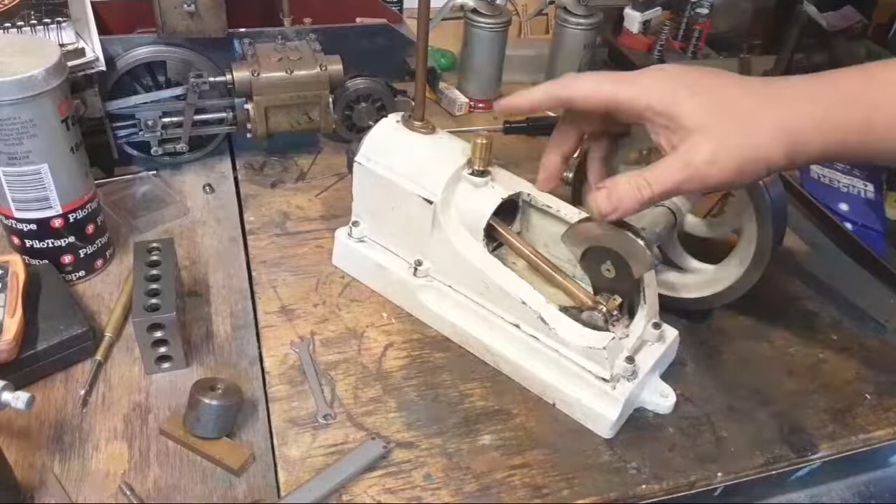Anyway, is there any blowback? I think so, I pulled them out last night and put them back in. They're not shiny all the way around, there's a couple of spots that still got machining marks in the rings. So I reckon this wants just messing with and playing with and turning over another few hundred times. We're still getting pretty dirty oil out of here, so I'd say the high spots are still coming off them. So I think we've got enough compression to run, but yes, there's definitely blowback. But we've also got a leaky head because I've only just bolted that on with a bit of grease.

I've done a fair bit of work here. Anyone following the Patreon project probably can tell.

I've put a spacer behind this gear. When I built this casting and made this pattern, I probably should have put little risers on the back here to machine off, to give us a raised surface to run this cranking gear on. But I never did, so it's just a flat wall. So I've put a little brass or bronze washer in there to take some of the rattle out of it this way — you don't get the rumble now.

I got this crank ground, the journal, I've made a new bush for that. I've filled this, I've oiled this. I put a bolt in here so that the bush doesn't turn. I made this end collar and put that on. I've drilled the piston and the big end so that the gudgeon gets oiled.

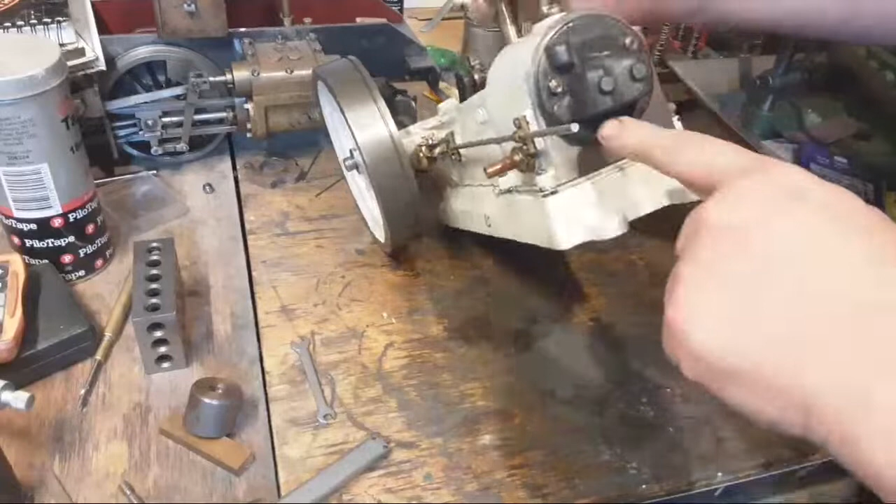This is an awkward thing to hold and set up. It is fairly level there. The casting's kind of pretty crap, actually — well, it's all right, it's a beautiful casting. But if we have a look, this isn't quite level across here. I've set it up level on these two dots here for the valves. This isn't quite, this is pretty good, and this has got a bit of slope in it too.

The rocker goes on here. The valves are about the same size as this. There's a manifold that goes in here with the exhaust pipe poking out under here, and gas inlets on this side.

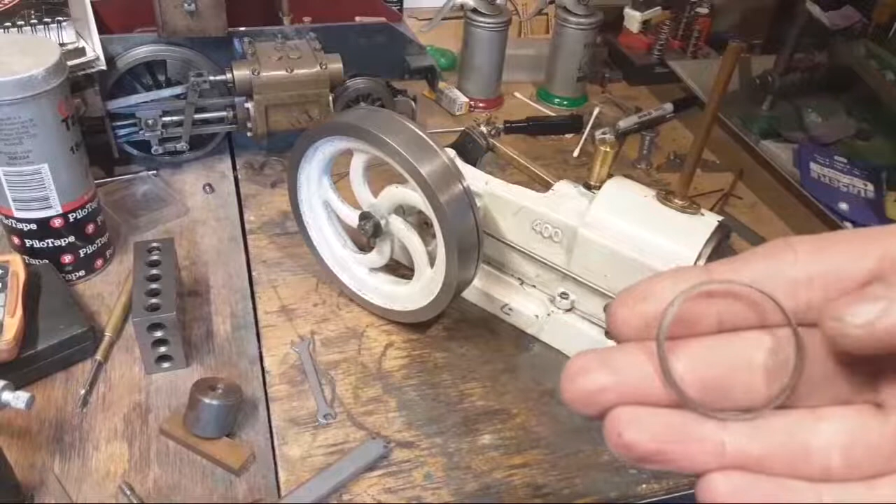Let's start with Craig's question about spare rings. I made 5 rings, this is them. They're narrow on one side and thicker on the other side - it's offset. That is so that when you split this, when they squeeze in, you've got equal ring pressure all the way around. There's as much pressure on the back here as there is on the sides, so that's the reason for that.

I've been asked that question about half a dozen times this week. I split them, and they needed about 1/8 inch gap, something like that, before they squeeze in and go in with minimum ring gap. So I just parted them off. I worked that out so I knew how much I could offset it, and I just put a shim under one jaw when I bored them, then parted them off and lapped them on a bit of wet and dry on the surface plate, then split them on an angle across, and fitted them in the bore, and they've got about 5 thou ring gap. So pretty happy with the way they worked. I've got 3 extras, may never need them.

Hey Steve - are there pockets under the valves? How do you mean by pockets? Does this have valve guide seals as well? No, not as such, it sort of does. I guess that's what you would call them, really. There's no actual seals as such, but it has got brass pieces in that end of the valve that rub against here, washers that follow up and down, that probably work something like valve guide seals, or valve stem seals. But we'll work that out when we go. I don't know, I reckon it's going to blow smoke everywhere, and oil.

These have - gosh, there's a drawing right here, I've been looking at it all week. This is what the ports look like inside. So this is straight through with the valve guide, and it was valve stem guide there.

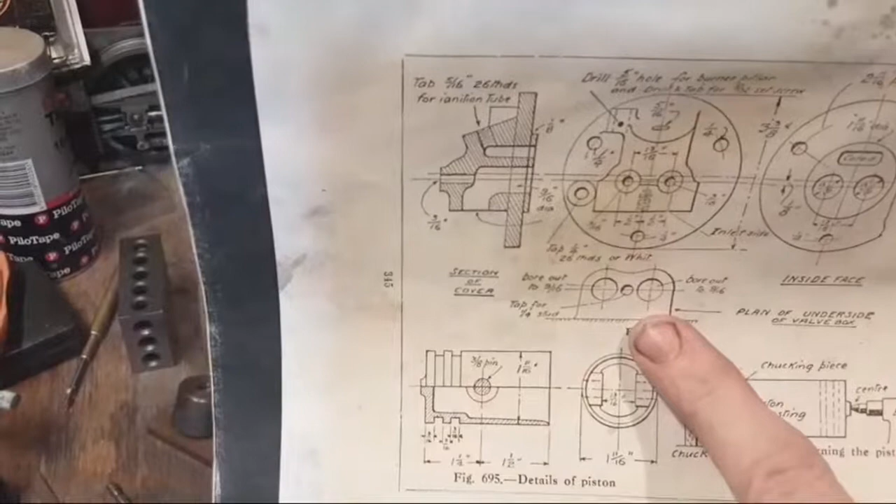And this one comes up from the top. This is a machine surface, and the manifold, which looks like this, bolts underneath. So pretty simple. It's got this piece here which should have probably been cored, but it's way too small to core successfully in this little casting. And in this little casting you're going to end up with hard iron because you're going to end up with chill spots and all sorts of things. So it's a better idea not to.

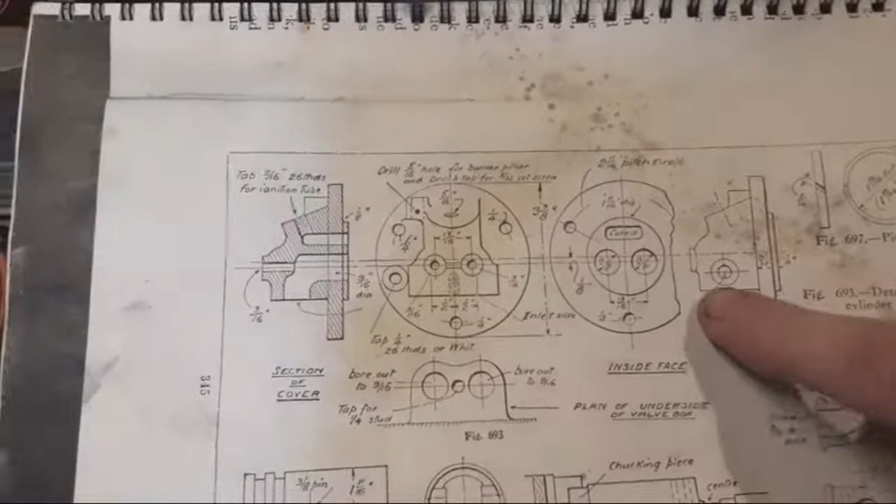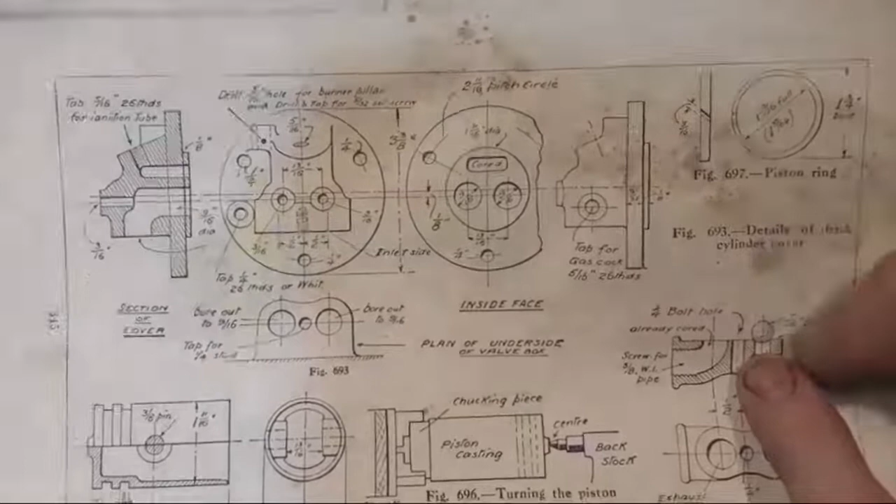It's 5/16/26 gas, the thread in the side there which goes in through here, which is for the gas valve. And the carburetor is basically a ball on a seat which stops the gas escaping. When it sucks, there's a little bit of air gas coming in at fairly low pressure, and it sucks the air in as it's needed. Then when the valve closes, this ball sits back down.

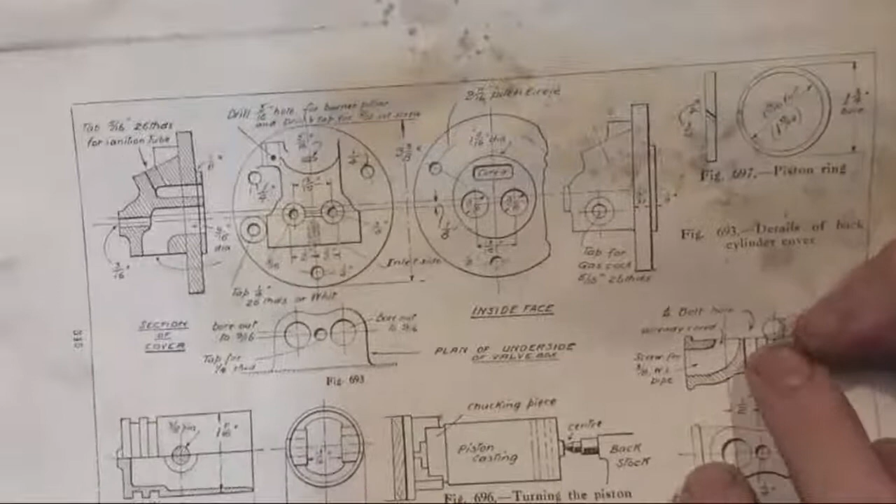So fingers crossed that works. I'm a bit nervous if I make this out of aluminium, which I originally intended, that we're going to end up with heat transfer from this side to this side, because this is the exhaust, and you're going to end up with pre-ignition. But I'm not sure how big a fear that is or how real it is.

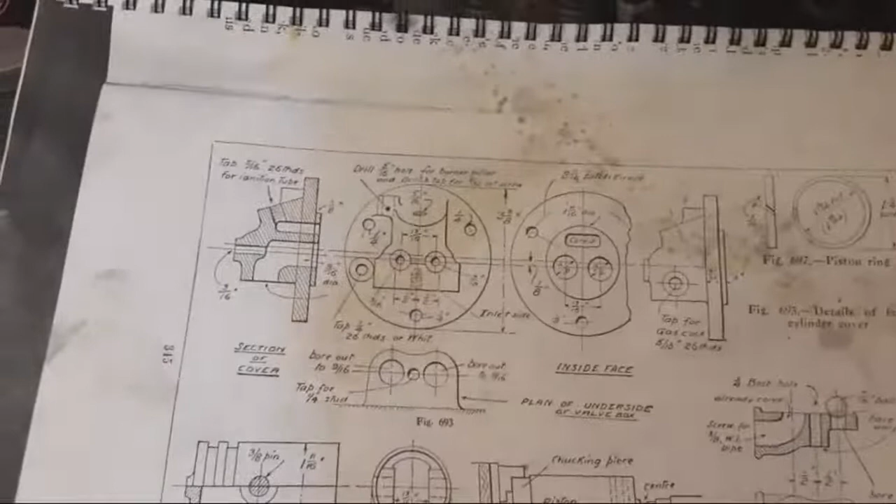These are all things to think of when you're designing and building an engine from more or less scratch. Although you've got drawings and dimensions and some notes, there's not much here really. So these, it says 9/16, but they're not that big - they're about 10.7, so whatever that is. 10.5, I'm probably I can get away there. This thing's about 93 thou bigger in the bore, so I can probably get away with 11 millimeters here.

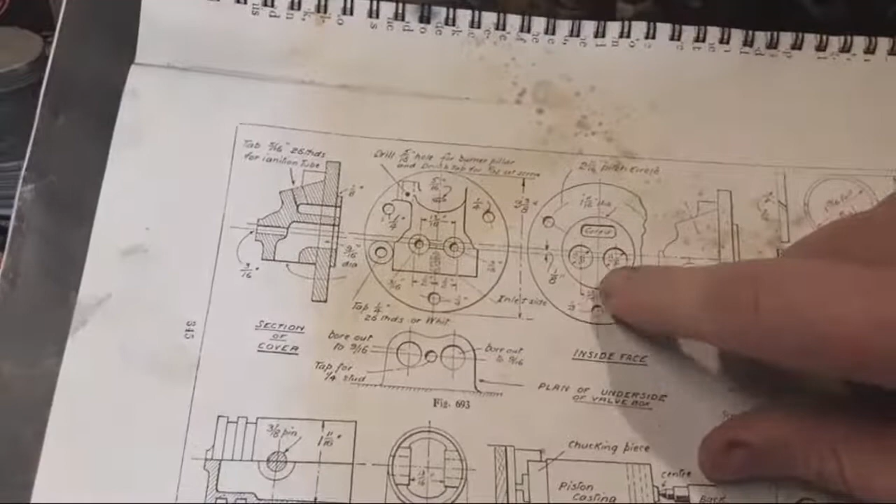And I'm just going to put these straight through, straight in here with sharp seats at this point, and probably we'll see how we go with valve seats. I'm not real confident about them. And the spark plug comes in from the top there.

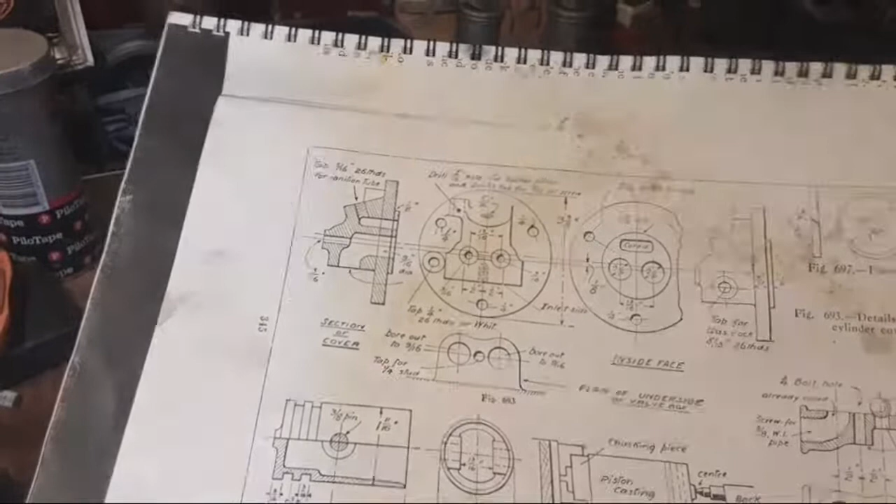The head snaps sometimes on two-piece. Right, that's fair, I hear what you're saying.

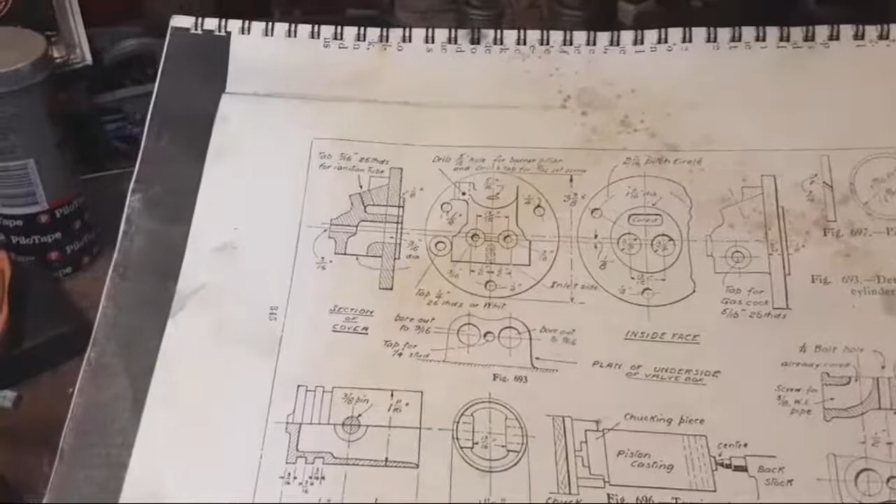Original had alternative screw-on valve head. Yeah, someone's been doing their homework. This is the valves - I don't think it's screw on, I think it's just two different shapes. This one's round and this one's been recessed.

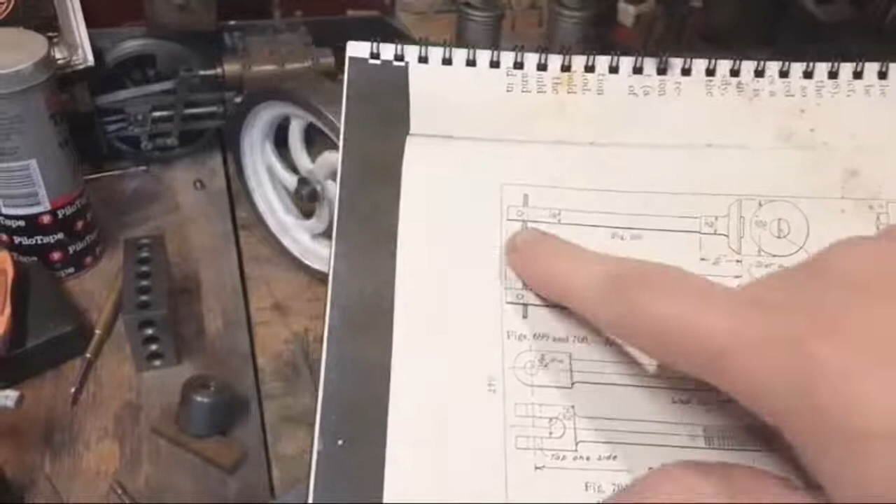They got a pin across the bottom of them, and that's going to mushroom out if I know anything, if I don't heat treat them of some sort. Whether I put a collet on there and a thicker washer, like a C-section washer on there and a collet, which might be easier if we machined a groove with a C-clip so that you pull the spring down and put the collet in and let it go.

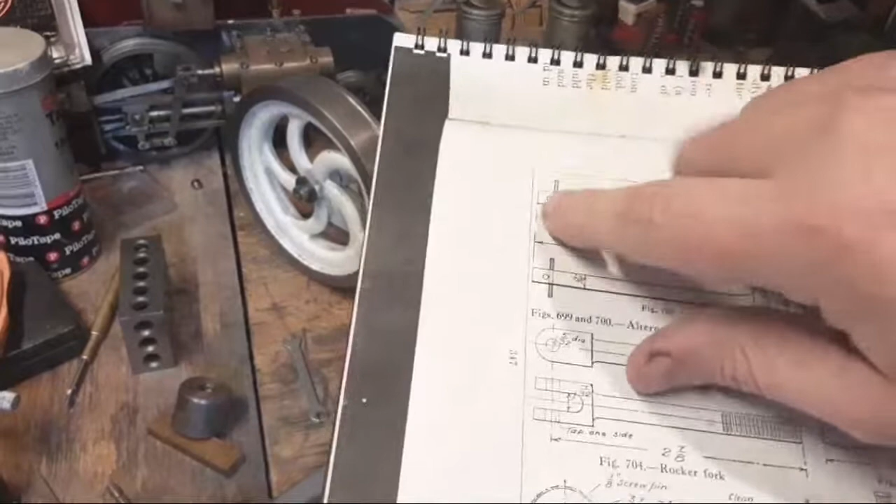That's probably a better system than a hole. I don't think much of a hole through the end of a valve, but if they're heat treated, then probably they'd be okay. This one, I don't think they would let go, but expansion might be different when they get hot and they could leak.

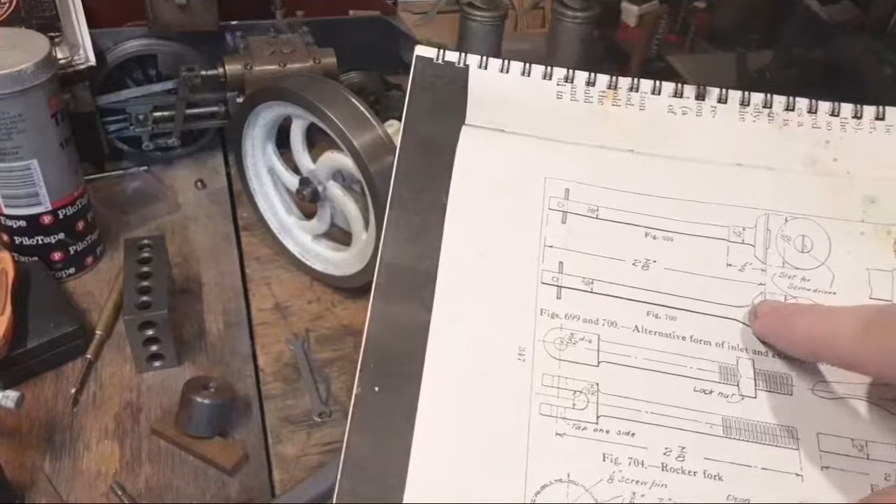If I make these out of two pieces out of O1, I'd be reluctant to silver solder it because I think you'd get hard spots and they would break. Probably you could machine this out of half-inch O1 and get reasonable results, or even out of something a bit softer, like a 1020 or a 1045, and case harden the ends of them might work too. So lots to think about there.

Kevin asks all the difficult questions. How do I cut the valve seats? Really good question.

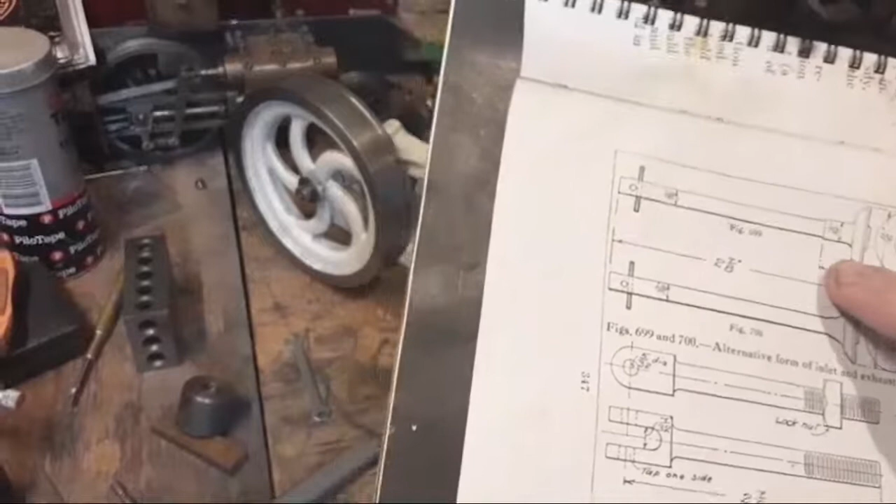I'm not going to put much of a valve seat on them. There's not going to be any 3-facet valve seats and any of that kind of gear, although that's probably the easy way to get them right if you could be bothered making cutters. I'm probably going to leave the seat square and make these fit in the right spot here so that the wear lines in the outer third where they should be. Gosh, I've learned a lot of stuff about engines in the last 12 months.

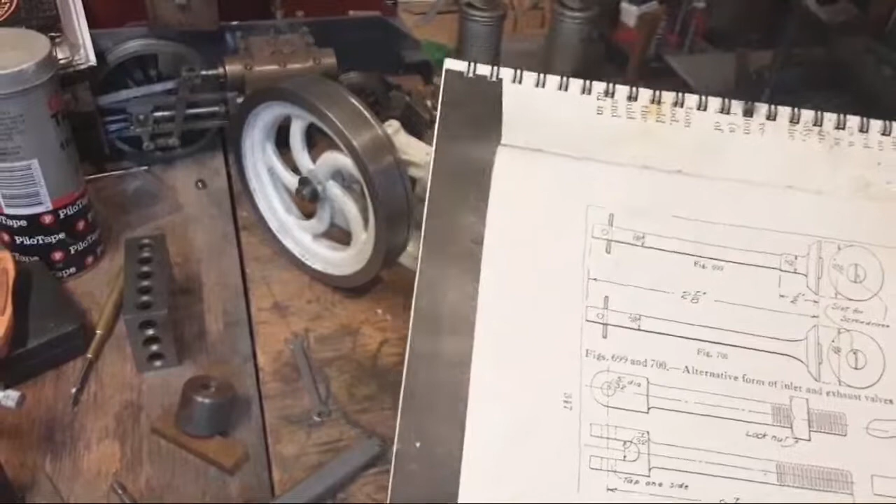And lap them at that and see if they seal. I'm probably not going to put long seats on them. I think they only want to seal on one ring around there. I don't think they want long seats. Decent valve seats with 3 facets are only very, very tiny as well. So I think I'm just going to leave them square and lap them. There we go.

That's probably all right, Kevin. I'm not sure about distortion too.

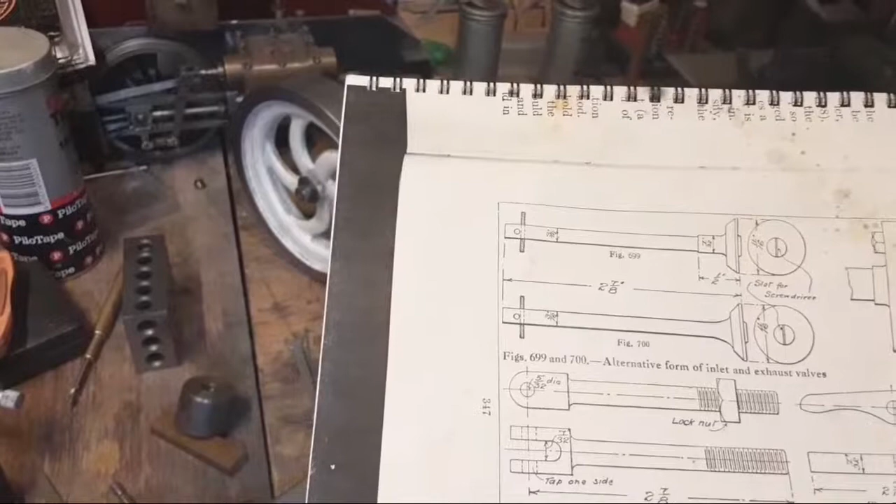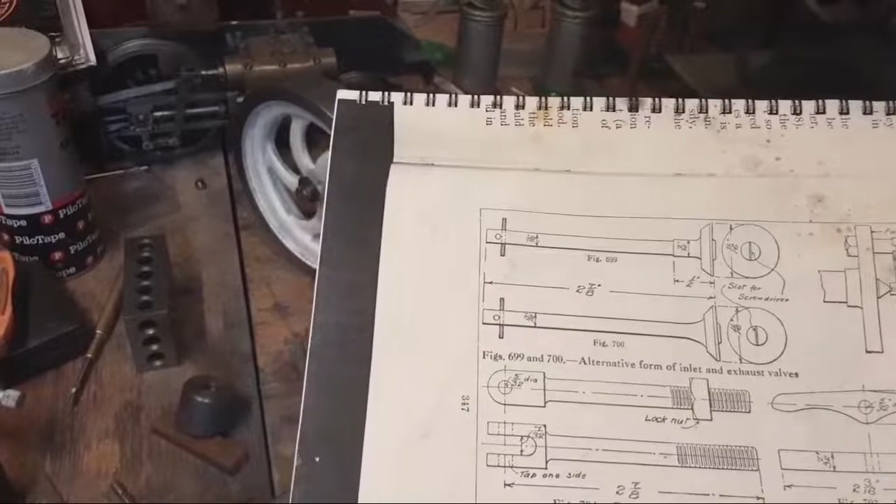Thanks, Uncle Bob's Bees. Could make a stone with a taper, yes, and a valve guide. I could do that. Hey, Stewart. Yeah, thanks, Warren. Thanks for confirming that. Thanks, Craig.

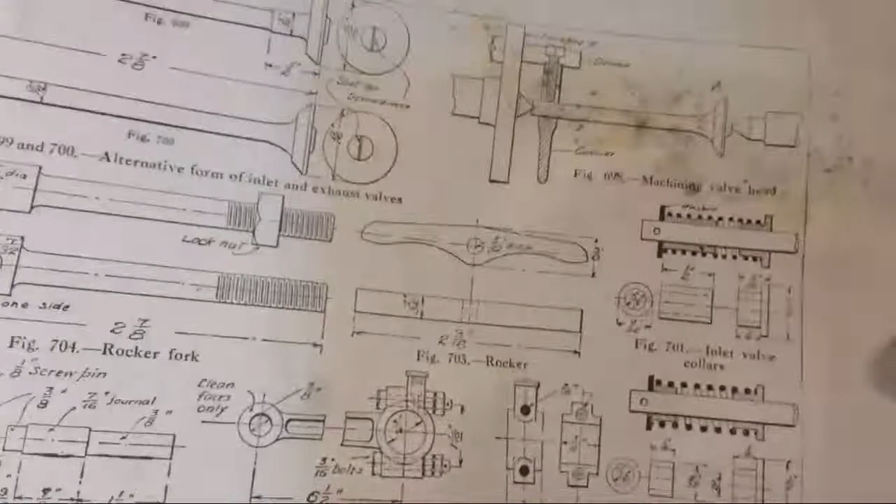So that's where we're at with that. This is how the valve stem seals, whatever they are, work. I don't know, there's this bush here. I'm not sure really its purpose. And there's a washer, right? And then I guess that's a tight fit inside the spring, and that holds it up against there, up against the washer.

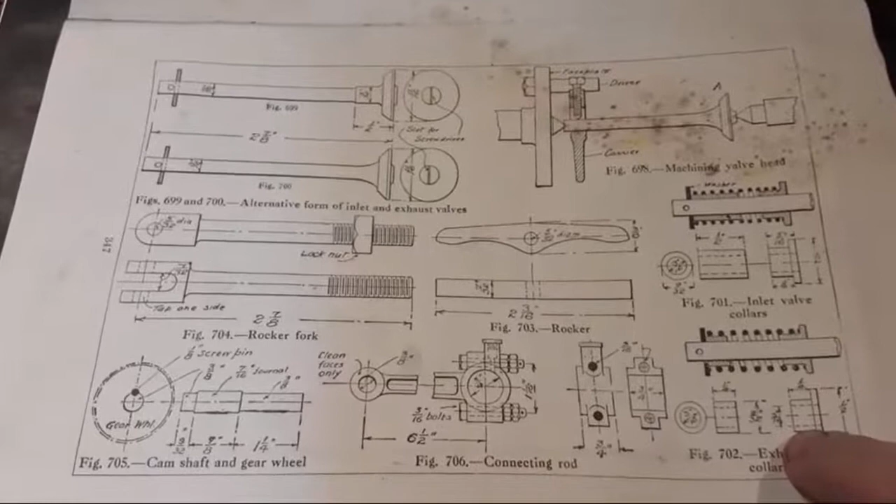And then this one here, I'm not sure about that. If anyone's got any insight into this one, here goes over the top, and the pin goes through here in the washer, and then this one goes on the bottom. This is the head end. So there's this piece here, which goes over the top, which this sets on, and then this piece here.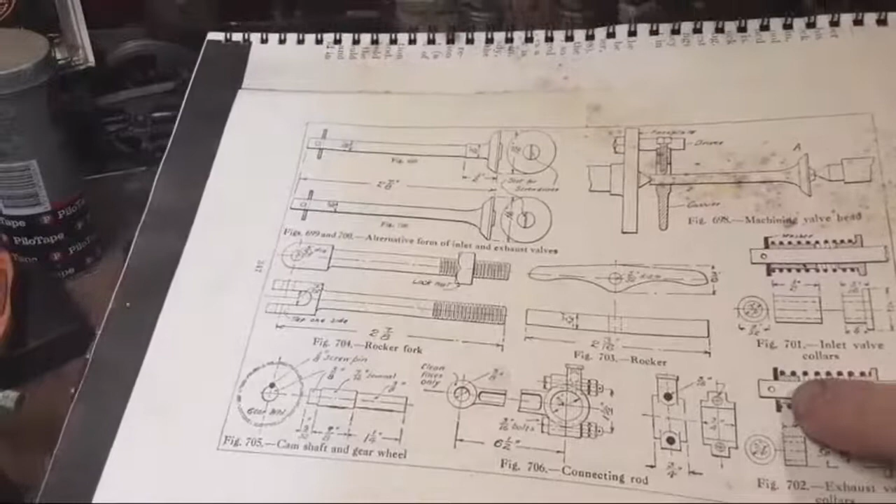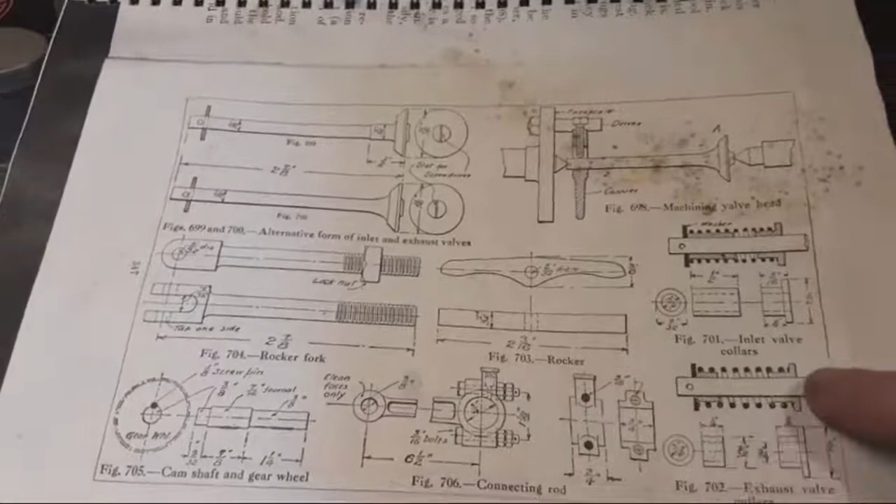I'm really not sure what this does. I guess it centralizes the spring, but I think I'm probably going to redesign this a bit. This does limit travel a bit. This is your exhaust valve, and your inlet valve hasn't got as much travel, so it doesn't suck as far. So this is quite a bit longer on the inlet valve.

Maddie, you're probably right there.

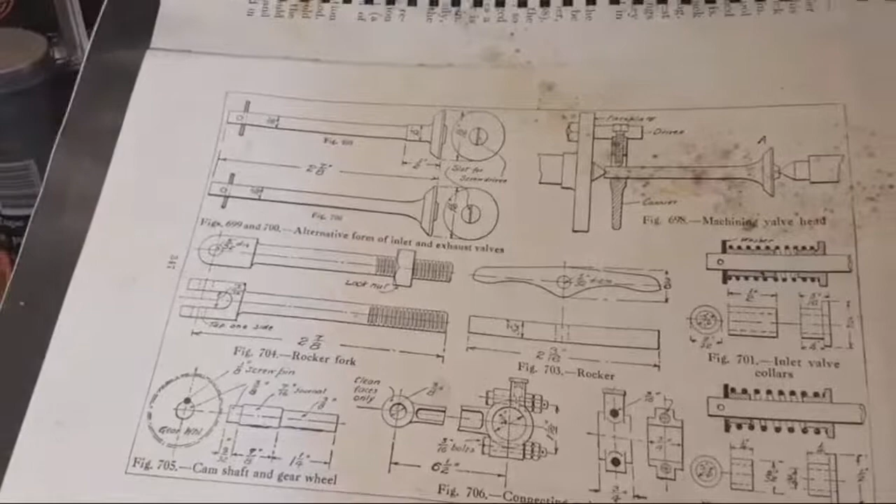So this is, yes, there's lots of bits in this engine. I don't know if you noticed, but there's a fair bit of work here. I've been 12, nearly 18 months on this. I've been 18 months getting it to this stage.

And we've got compression. And it's getting better all the time. So that's, I think we've got enough compression to run.

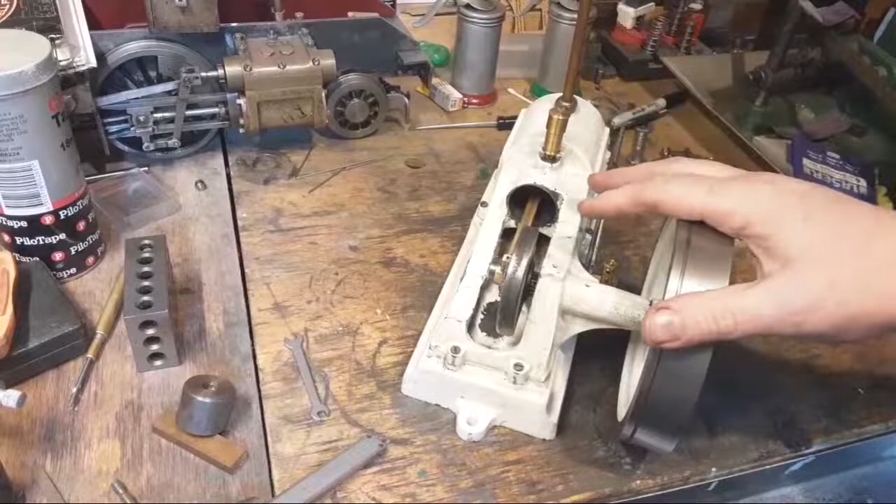We've just got to get some timing, got to get some spring tensions right, and we've got to get some gas right. There's just a little union cock on here that goes, the threads in here with a tap on it for gas regulation, and I guess we need a regulator on the tank. Well, I'm going to just run on a little LPG or propane tank. I think it's nice and clean and easy.

There's enough work in that loco. Got bolts coming for the tender, so I can move on with that now. I've got a new 3-jaw chuck, but I really wanted to make some progress on this, and there's probably going to be another video out on Patreon with this cylinder head.

This is not sitting real firm because there's a fair bit of weight on this side here. It's all right, there's something under it. The other thing is that we've got, I don't know what's under there. Something's under there, there's a bump there. Oh, it's glue or something on the bench.

That's what that is. The other thing is a cooling system. And the easy way is just to put a tank here, like something like that, which is a bit boring.

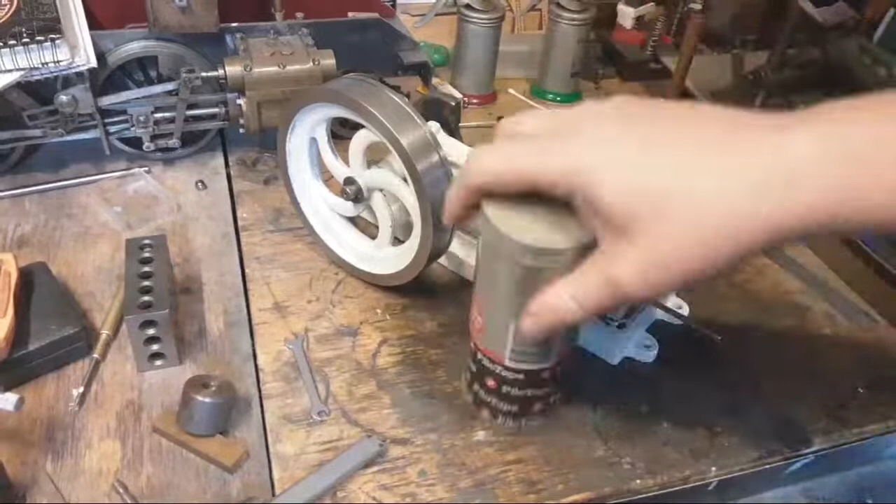Joseph says ugly - this is ugly, yes, so really not nice. We can make a nice galvanized screen printed proper tank for it if we wanted to, but it's ugly.

The other system's a radiator, with convection or forced circulation or whatever. For that you really need a tank, you need a pump, and if you have a pump you're going to need water in it every time it runs. What I would really like, personally, is probably a round tank here, about that high.

You're probably right. It won't use a lot of gas, I don't think.

It's not going to be green. I did leave you a little - I guess - quite a big hint in this video about what color it's going to be. So anyway, you can work that out. I've got the paint anyway, so you know it's too late to make a decision on that.

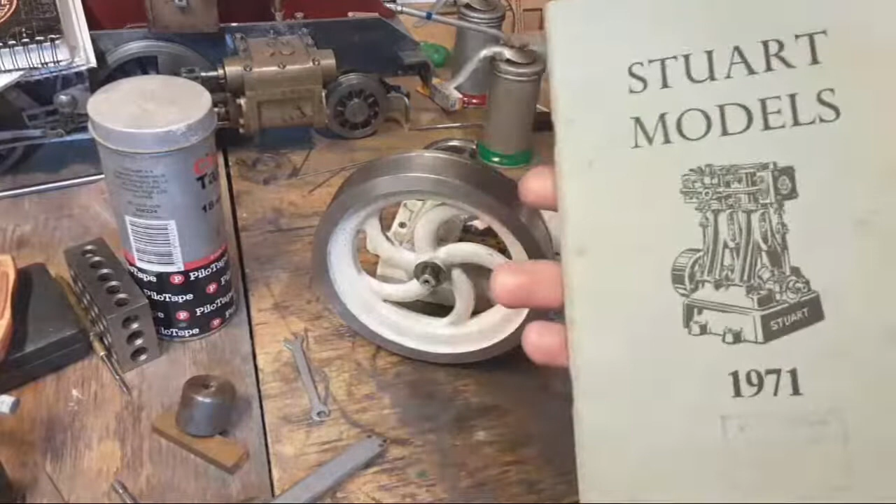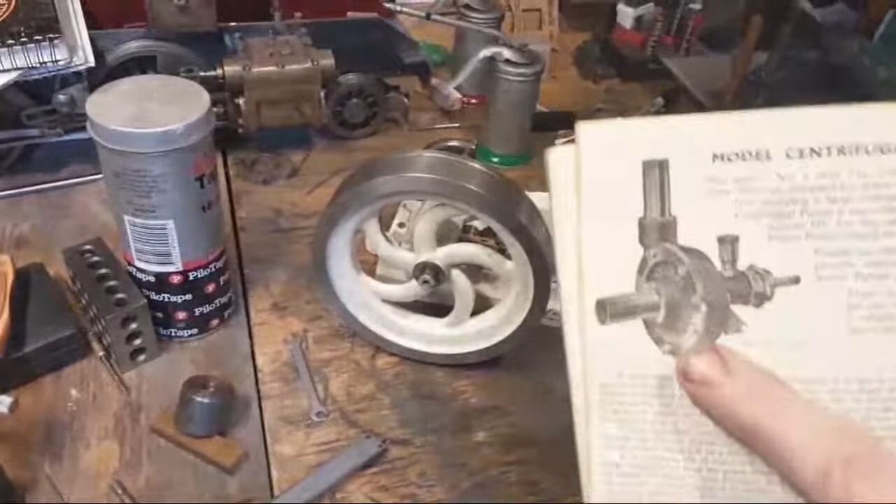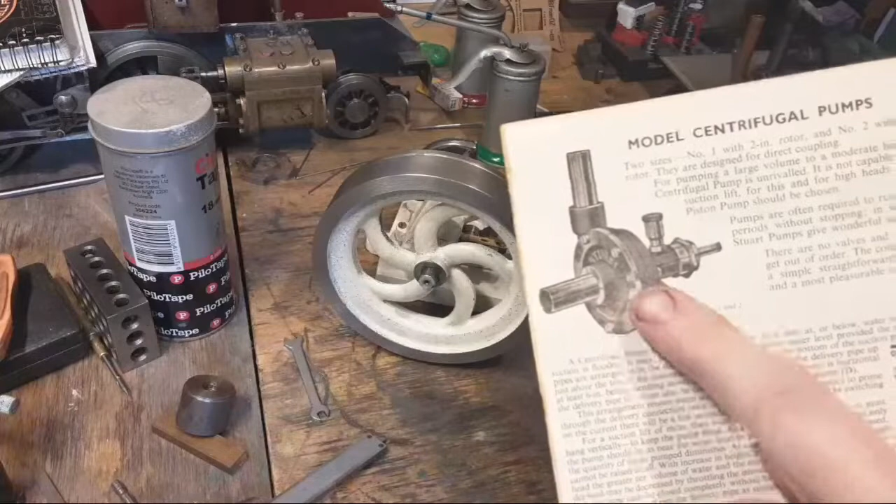Stuart made for a while the #1 pump, which is in this catalogue - and for quite a bit of time from the Second World War onwards they made this little pump, a 2-inch centrifugal pump. Now if we scaled that down three-quarters, same as the engine, it would be about 1.5 inch diameter. We could sit it here beside the pump and run it off this belt pulley, and we could pump water out of the tank into the bottom of the engine.

So that's the thoughts on the cooling system at this point. However...

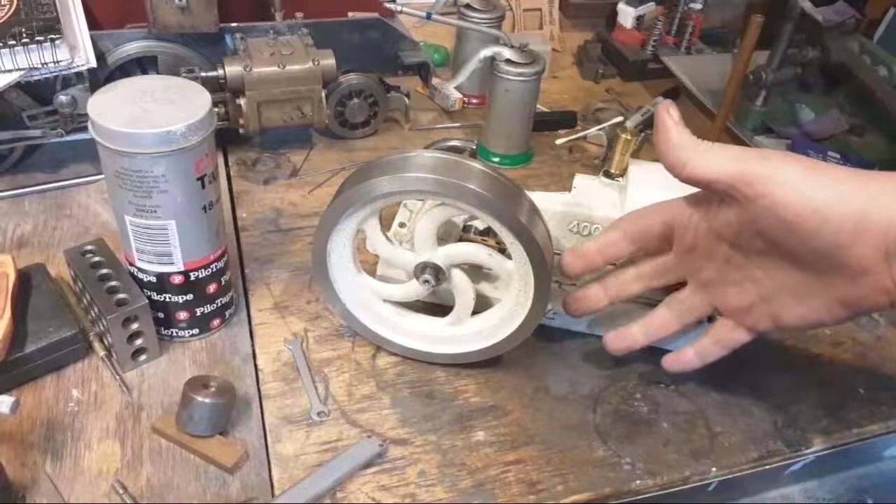It should be a fairly easy part, and I've put some feelers out for a set of drawings for the Stuart pump. It's only a very basic curved impeller, and it's two pieces, with a gland packing bush on it and a stainless steel shaft, which would only be about 3/16 shaft, and some brackets to sit it on the bench - you could put it beside the radiator or on the side of the radiator and have this run on that.

However, that pump, even at only 1.5 inch diameter, is going to run enough that it's going to shoot this about 5 feet at the speed that we can get off this big pulley. So not 100% convinced about that pump idea.

So what I'd like is a little gear driven piston pump. We haven't got much room - about 2 inches, or maybe 1.5 inch. We've got probably 30 millimeters by 100 millimeters by 50 millimeters to put a little gear driven plunger pump in here, and it only needs to be, I reckon, the diameter of this pipe, if that, with about a quarter inch stroke on it, and that would be enough to run the cooling system.

But this project is contemporary with this one, right? And I really wanted to see what was involved in a project from Stuart Models that was contemporary to this, because I've only really been guessing. I haven't even actually seen an advertisement for this engine, let alone anything else. I've seen a couple of engines, so I know they exist, and I've seen a couple of the later ones advertised, and I can see a family resemblance, so I know it's Stuart. But I really don't know what they're advertised at, or what sort of... If anyone's got any ads on this engine, it'd be awesome. But I wanted to see how much more put together an actual kit from Stuart was from this time period.

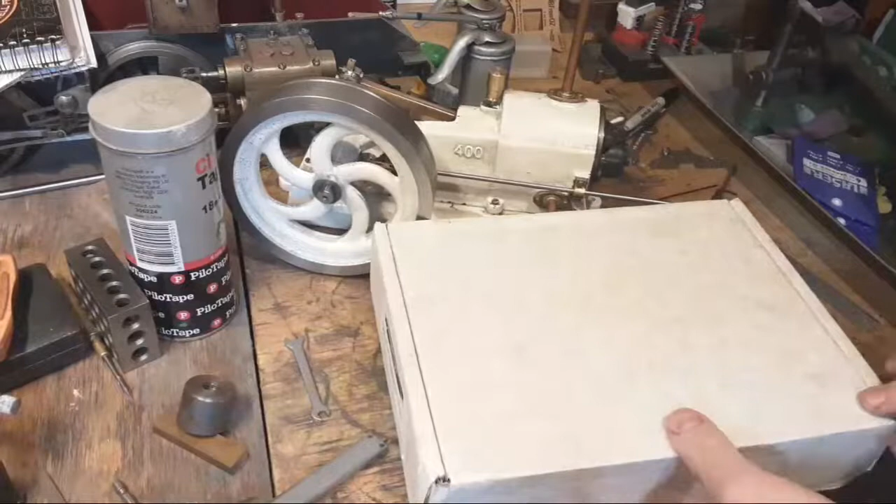This is... what is it? It's up here in a box, hang on. There we go. So this is a contemporary project. Probably never going to happen, and it won't hurt to sit on the shelf for a bit.

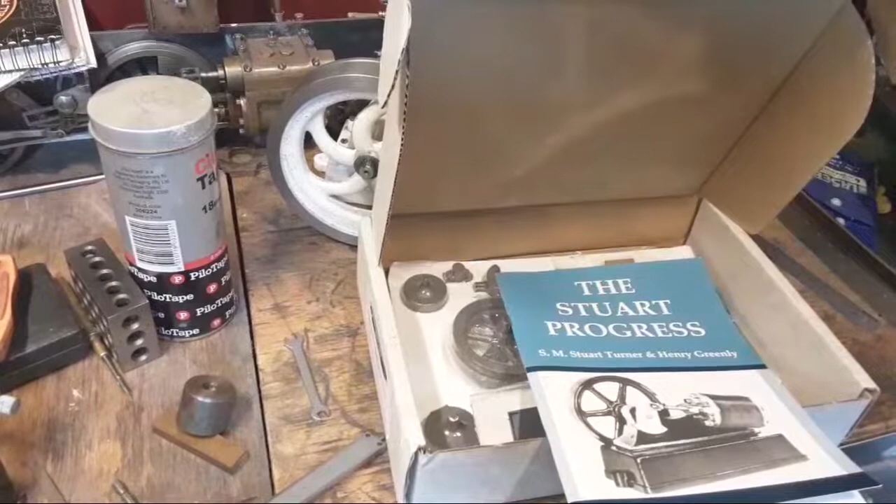I was reading a book. This is the Stuart Progress. Stuart Turner and Henry Greenly, same stable, same design team, same parentage. The difference is that this is reproduced, and the kit's still being made.

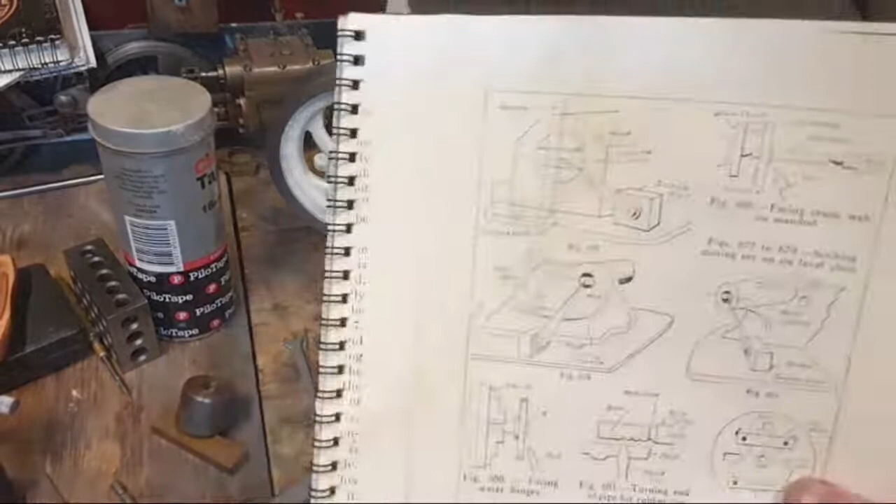The Progress cylinder and flywheel was part of quite a big family of engines that they designed, and they're all in this book. But the drawings and diagrams and sketches are pretty much identical to what I've got. In fact, this one here, setting it out with this scribing block with the hinge piece on it, is exactly the same as the one in this book. Same scribing block - obviously that was the way to do it, how to set it all out.

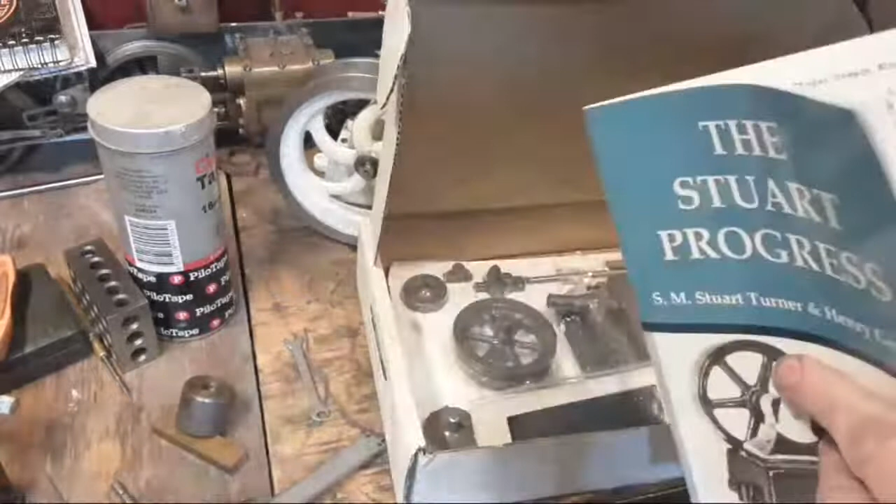So same draftsman, same artist, basically the same writing. And this was published... it's a reprint from sort of just after the First World War, I think. Very, very similar technology, and that's the bits that you get.

There's a piece of cladding sheet, a piece of gasket material underneath. There's a flywheel, there's a cylinder, there's two cylinder heads. There's a crank, which is basically the same sort of thing, the same family as the crank on this 400. There's the single outrigger bearing block, which is very similar, and there's a base, which is also fairly similar, and all the bolts and a couple of bits of O1, I think, that haven't even been deburred. I really wasn't very impressed about that - they could try a bit harder. And there's a gland in bronze, and I think a piston in bronze, and the slide big end, I think, in bronze.

So that's the Progress. It's not an expensive engine - that kit with the book and all the bits was less than 200 Australian. It took 10 days to get here, so mail's nearly back to normal. And that's a contemporary engine, a very small engine, but contemporary to the Stuart 400. So it gives you some idea what they come with and what the drawings look like, and they're not all that much different to the drawings for this. So probably if I'd bought this kit in 1920, I would have ended up with exactly the same stuff as I've had with this.

Mr. Pete built this and did a good series on it. I think it's a pretty nice engine, and I don't think the castings look beautiful. It's a fairly simple thing. Everything's in the box - your gland packing, springs, bolts. It's all in BA, so for all you American guys, that's apparently a problem.

It's a nice little flywheel, a fairly simple thing that you would machine on a lathe, because in the 20s, most home workshop guys, that's all they had was a round bed Drummond or something like that, or a treadle lathe. You could chuck this up and do it in the 4-jaw if you needed to. This could be done easily in the 4-jaw. Could be done in a mill too.

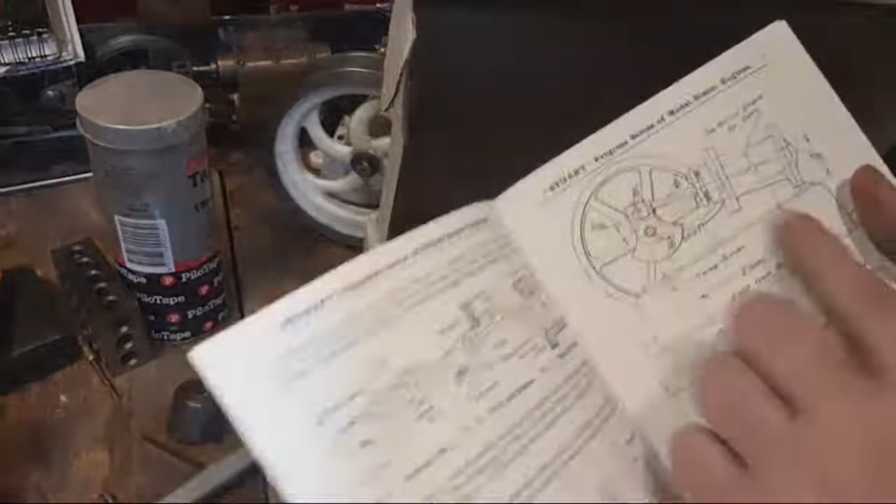I think this would be suitable for beginners. It's open to a fair bit of interpretation, same as this. The drawings and the book are pretty good. The book's got everything in it that you're sort of going to need to get it going. To my mind, it's probably bang for buck.

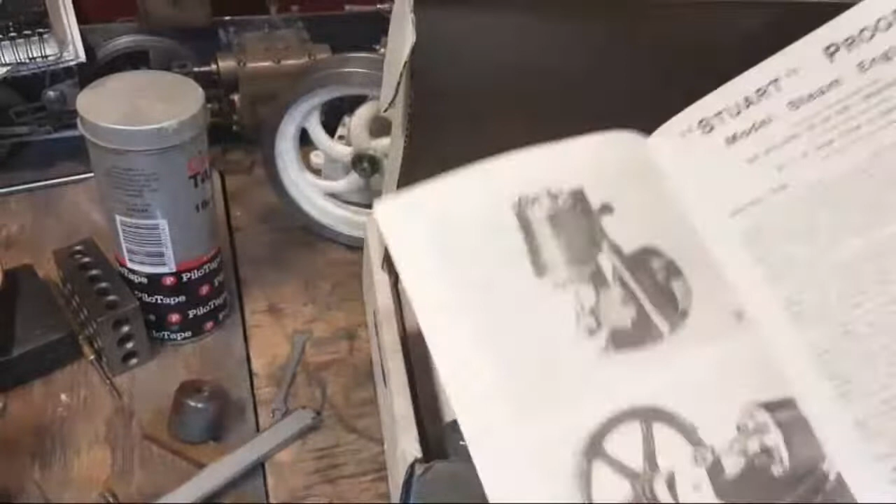It's probably one of the nicer steam engine kits. I really like this, but the PM Research one is probably about the same price for a proper slide valve engine, and a bit more, probably a little bit more traditional. I don't know, but this is a nice vintage engine, and I really like this.

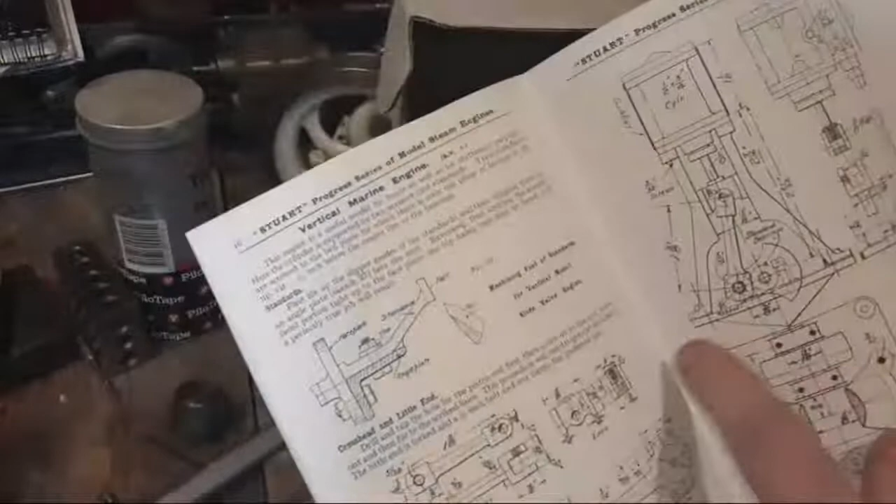And all these used exactly the same parts, these Progress engines, vertical marine engine, and there was a whole family of them. And from that, I guess, from that basic library of parts, this was somewhere up the tree. So, there we go.

Yeah, the person who sells on all this crap when I'm gone will thank me for buying this. That's where we're at. Take care, Kevin. We won't be too long, I don't think. Wouldn't bother coming back. Anyway, we're getting a bit late.

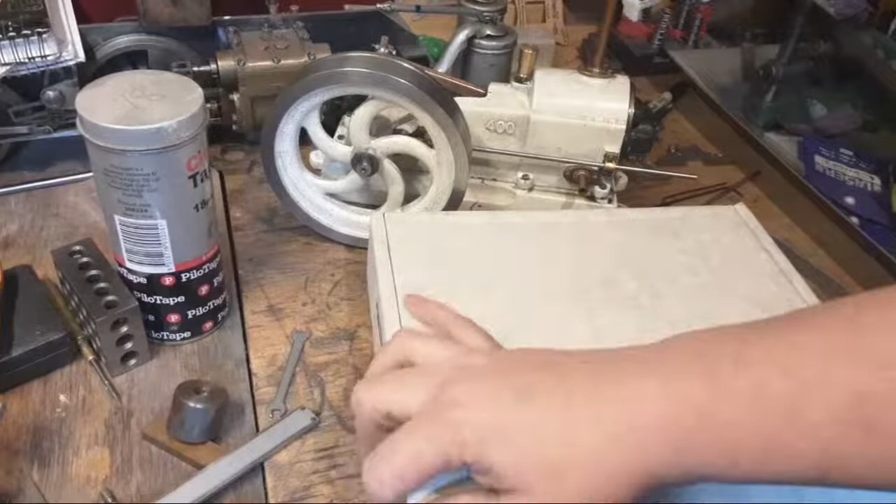What else? What other exciting things have happened? Not very much, to be honest.